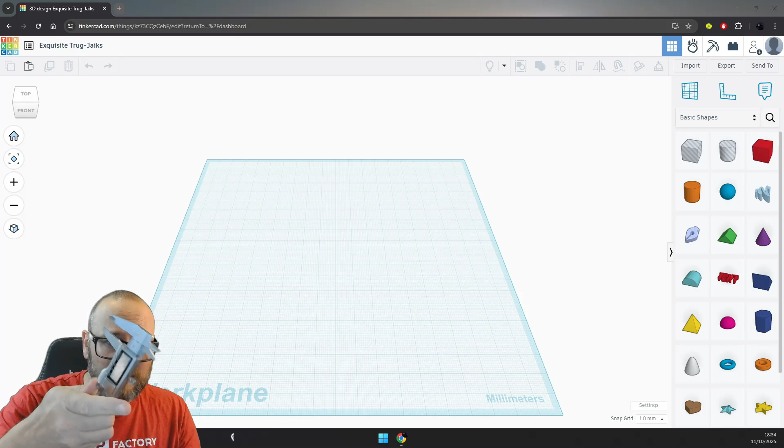So all I'm going to do first off - I've got the design, and the good old measuring calipers that have run out of batteries. So what I need to know straight off is how big this is. It's bigger than my calipers just - it's 130 millimeters long. We're not going to go that big because we don't need all the space inside, we're not pushed, and I want it to 3D print a bit faster. So it's 130 by 75 millimeters.

I'm not telling you what that is in freedom units. If you work in inches, figure it out for yourself. The rest of us work in millimeters because it's an easier, better type of measurement. So get used to it.

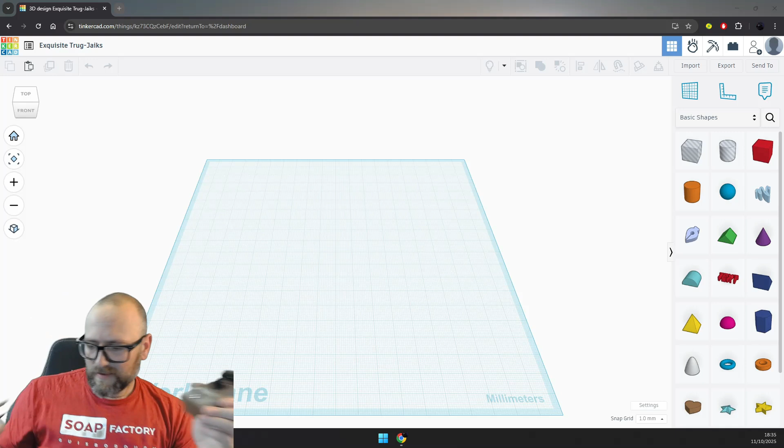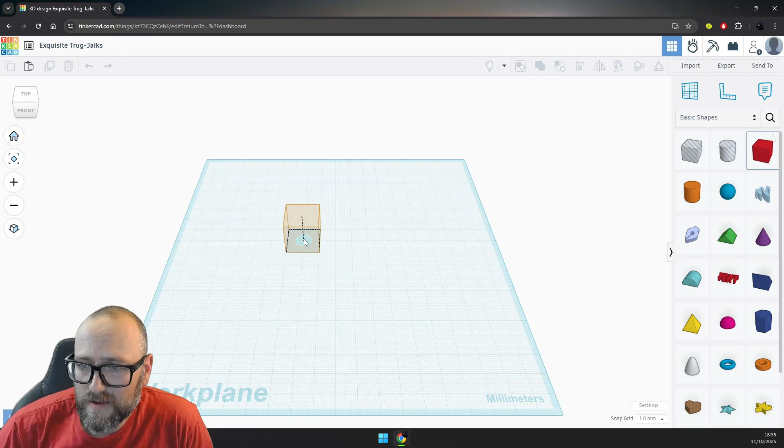And it is 37 millimeters high. Right off in Tinkercad, I'm not going to make it that big - I'm going to make it smaller than that, but not as small as this. But I will do a mini case, I might decide I like them better and go with that. But we'll just take the square for starters. We're going to make it 30 millimeters high, so not 37, it'll be 30. You don't need all the space, it's fine.

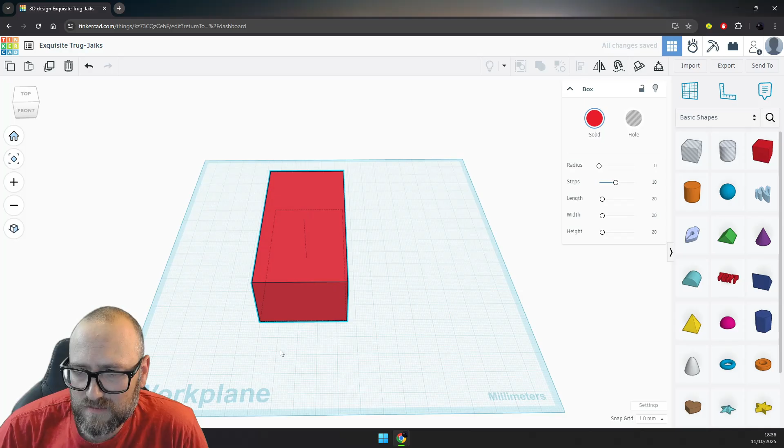45 by 90 - that looks like a reasonable dimension to me.

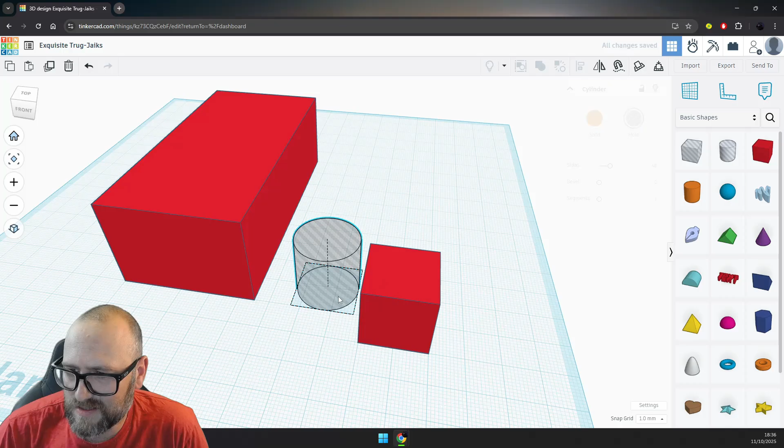And what I like to do is round the corners off - you'll see this in everything I do, where it lies flat on the print bed. I like to round the corners because you get less failed prints, because with square corners it seems to be like a stress point as you print, and a problem area. If you're going to get a problem arise, I personally found it tends to come on square corners, like a stress point in engineering.

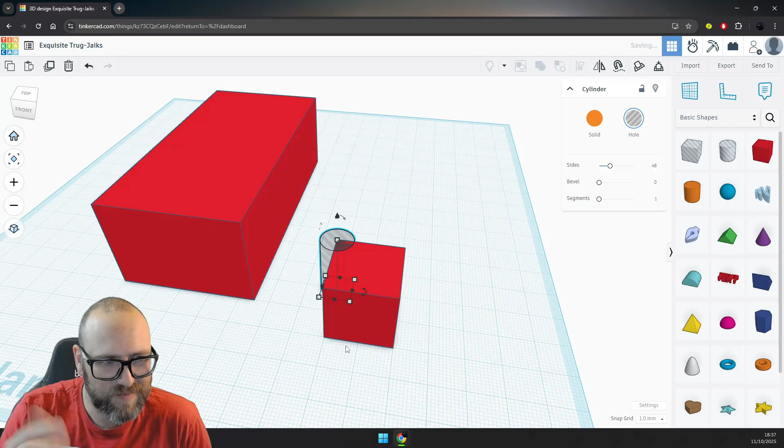I don't know whether that's just in my head, but that's personally what I've found from things. So we'll merge those two together, and we've got the cutout for the corner there. Take that up so it's 30 millimeters high, and we make a hole out of it.

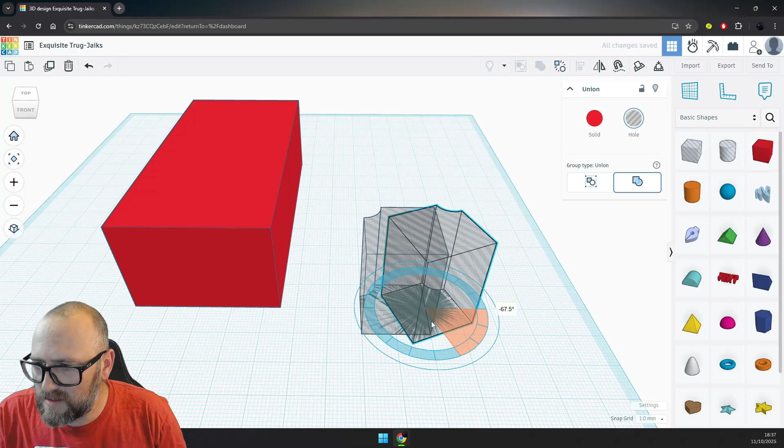We're going to copy and paste, so we've got two of them, and we'll turn that one around to meet that. Oh, I've double clicked on it - my mouse is breaking a bit, and this is why. Oh no, we're fine there. Oh, it's done it again. Like I say, there are better tools out there, but this one's free, and I get away with it, and it does what I need.

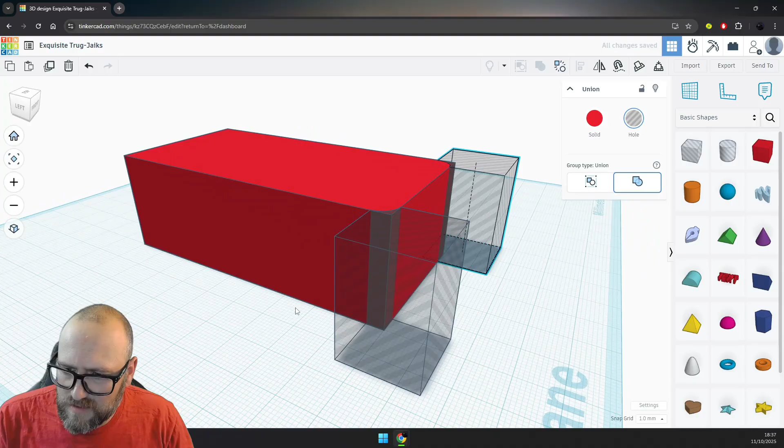So we'll copy that there, move that there, and they are both lined up where we need them. So we're going to copy them, paste them, and turn them around that way. And we'll move them up here. There we go. That is all four corners aligned.

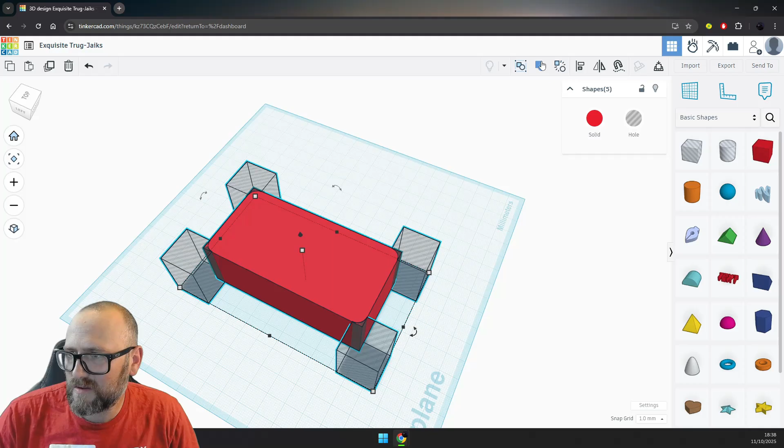So we'll Control and A to select all. It's the usual shortcut keys, and we'll hit merge. And there we have our case design. You can still change the height of it if you need to, but there it is with the rounded corners. It's 45 millimeters wide, which I'm actually thinking on now, that's a bit of a pain in the ass for finding the center line of it, but I'm sure we'll cope fine.

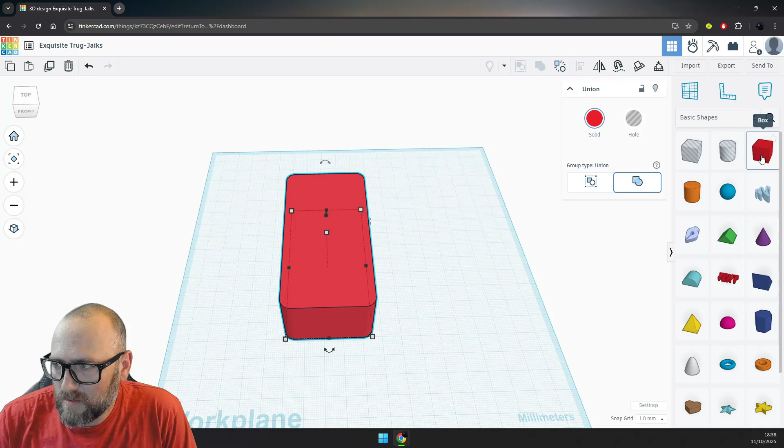So yeah, let's crack on. The first thing I kind of want to do, obviously it needs to be hollow. So the best way to do that, I want the 3 millimeter wall thickness on it, just because I found that works well enough.

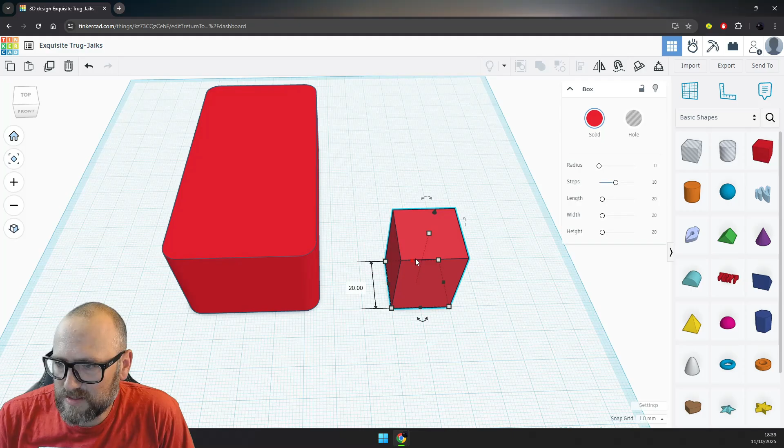So we want 27 millimeters high, and that is 45 by 90. So it's twice as long as it is there. So we take 6 millimeters off both ends of the 90, and that gives us 84 millimeters. The width is going to have to be 45 minus 6, that's 39. 39? Yeah, 39 millimeters. What I should have done with that, in fact, I can do it with this - I can ungroup that.

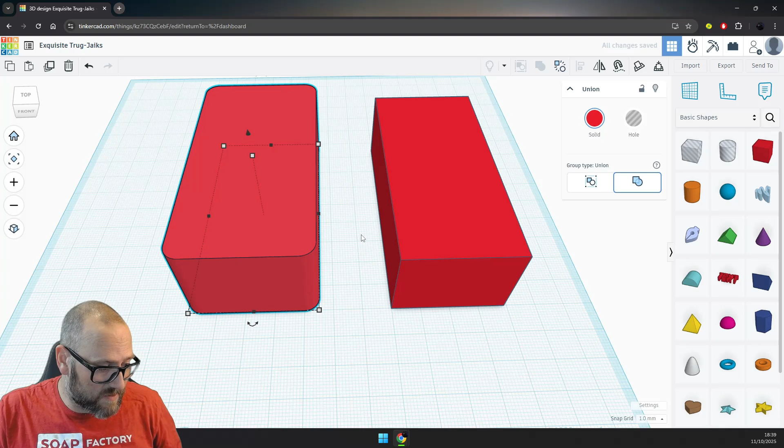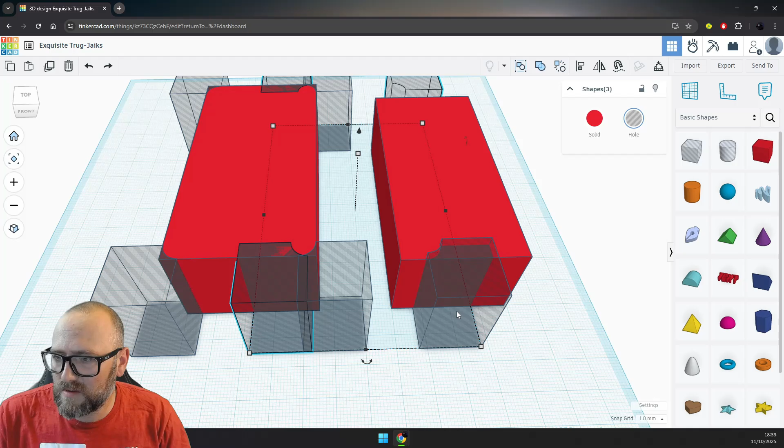There we go. We'll select the four corners, copy them, paste them. Doing it again. So that one, that one, that one, that one. So, what is it doing to me today? It'll be because my mouse button, for some reason, is playing up. Maybe I need a new mouse.

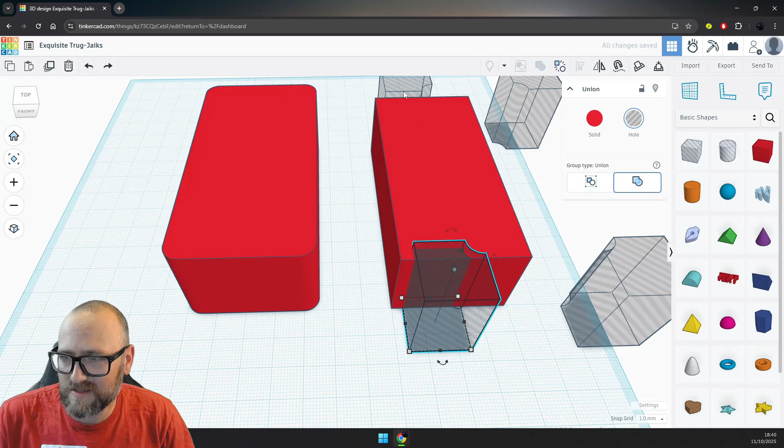So we'll click and drag them over there - worry about them later. And we're going to just select all these, actually, merge them back together. We'll select these four. This mouse button is going to give me hell through this video, I can feel it coming. But this is what I do - I don't script stuff, and it's all real and live, and this is as it happens properly.

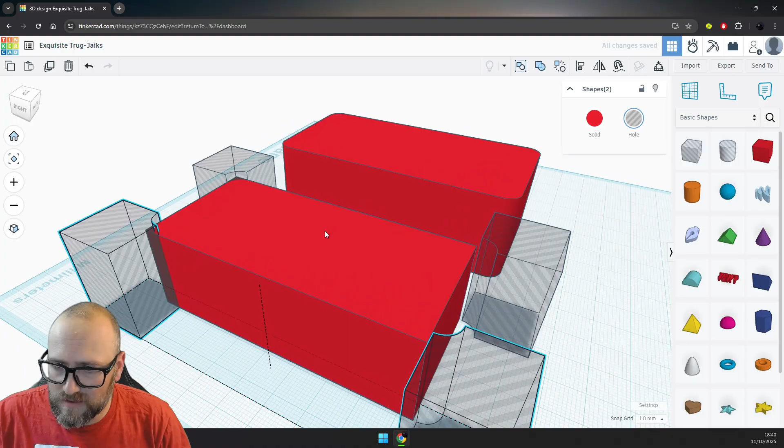So there we go. These two we then need to move to the left a bit. You can use your keys rather than dragging with the mouse, and if your mouse is dodgy like mine, it's probably going to be less hassle for you. That's good. So then we drag these two up there, because we're going to have to trim the corners off this to make it fit inside that.

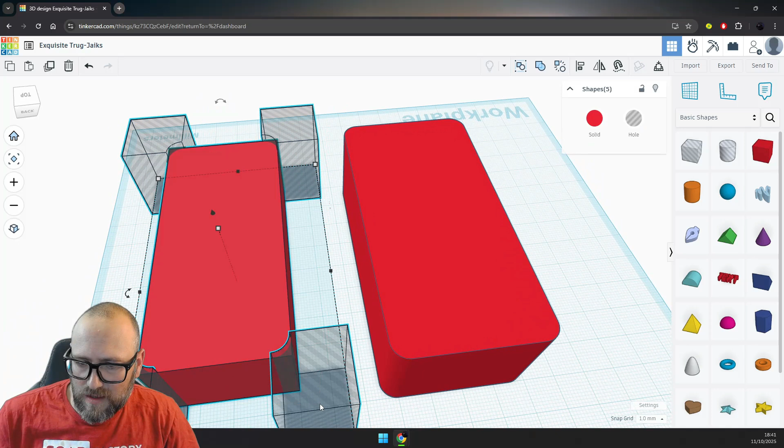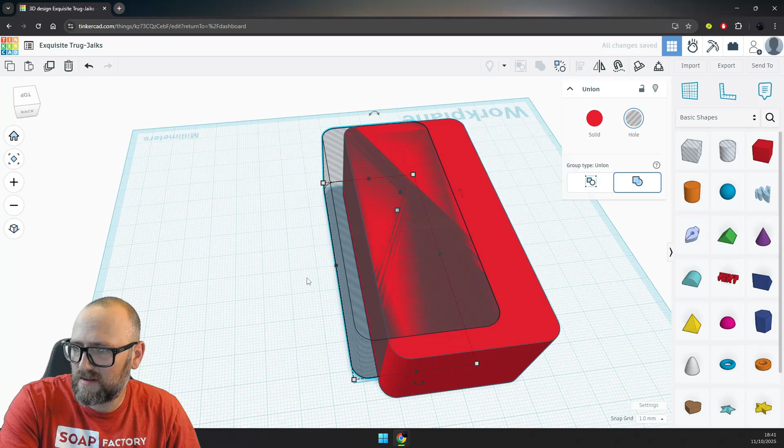So all we're going to do now, take them, and we're going to union group that. We're going to turn it into a hole, lift it up to 3 millimeter thickness, and we now need - what is it doing? There we go. We now need to move this right into the center of this one. So we might need to change the scale on it. Oh, will we? That looks well lined up.

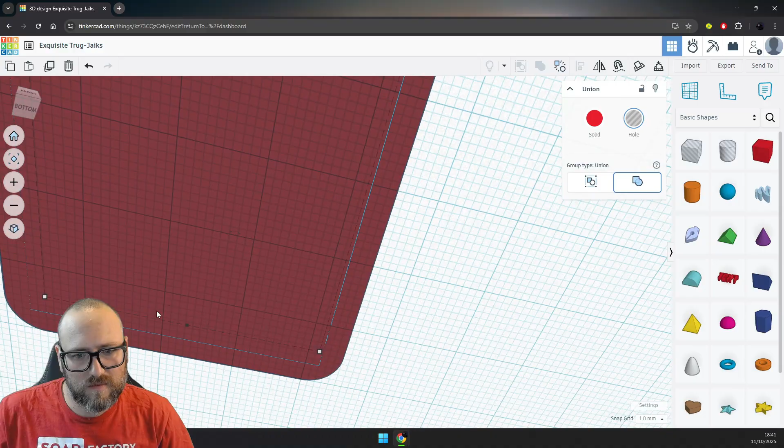And we can check from underneath. You can count the squares there, with 3 off that side, 3 off there. So by association, because it was 6 millimeters all the way, we should be 3 off there and 3 off the bottom as well. Yep, we are. Well done, I can add up.

We're going to select all again and union them, and that should give us the hollowed out box, the enclosure. Maybe at some point we'll do a back for this. I will.

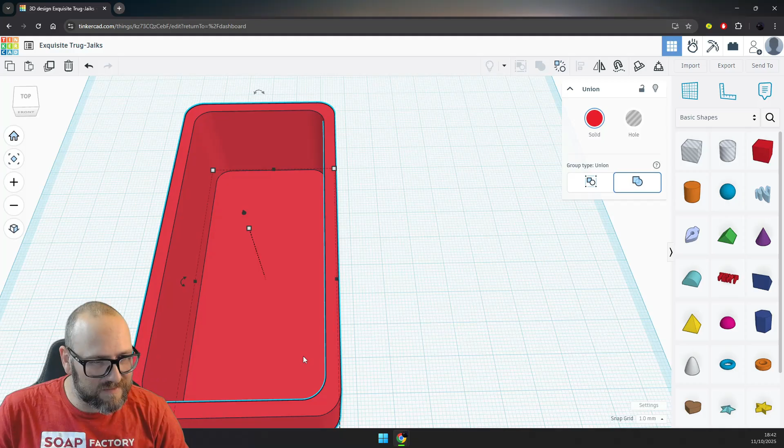I'll do one later. But sometimes it's nice to leave the back off so you can get in and mess around.

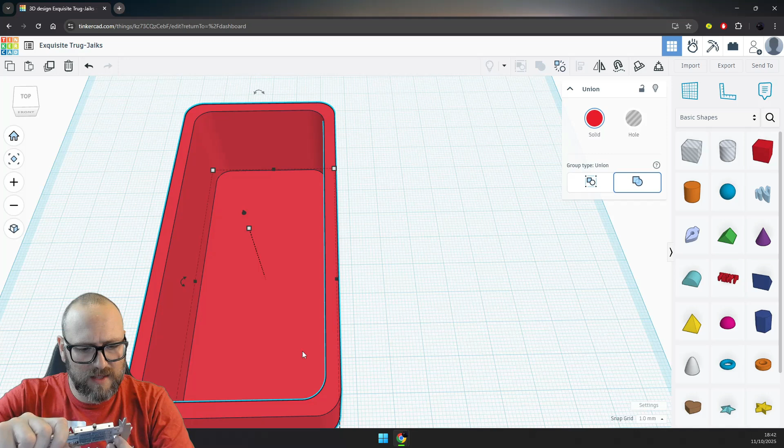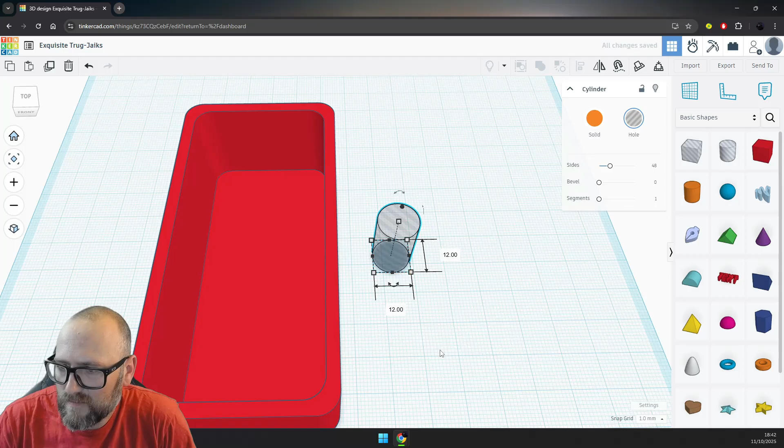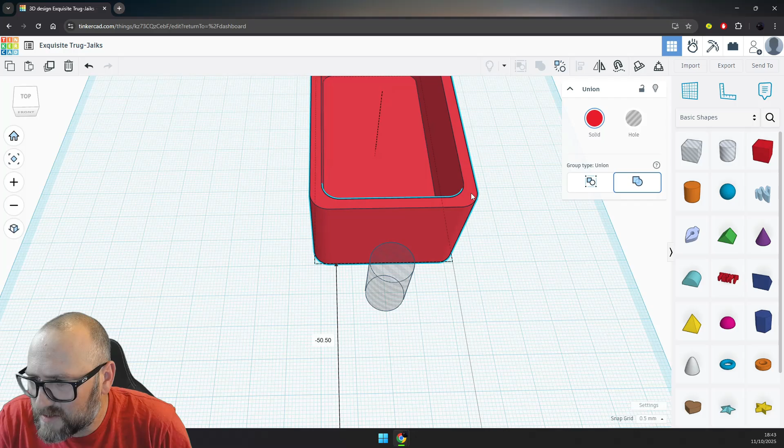But now we need the halfway point of 45, which I know is 22.5, but we're going to set our grid to 0.5 millimeter steps, and we're going to place that so we're 2.5 millimeters in on that line there. So either side will be 2.5. That's our center line.

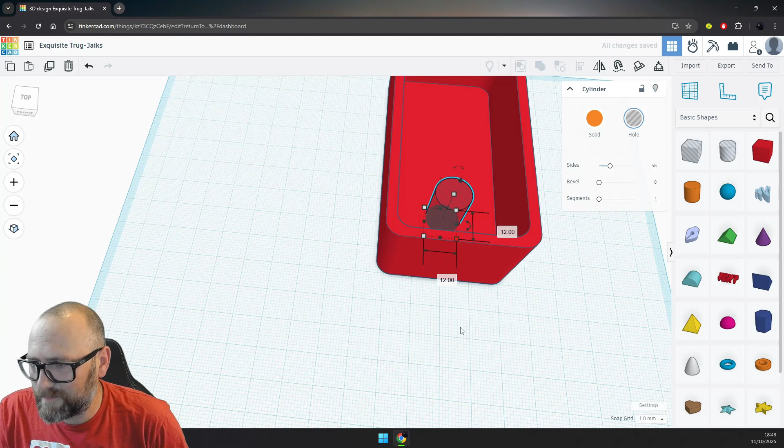And we can go back to a 1 millimeter snap to grid now. And what we want to do is just place that kind of evenly in the bottom. So maybe we should have done it the other way, but I did it that way. So we'll move that back up, with 13 millimeters off the bottom, and that should be 16.5 off the sides. That gives us plenty of room and space for everything.

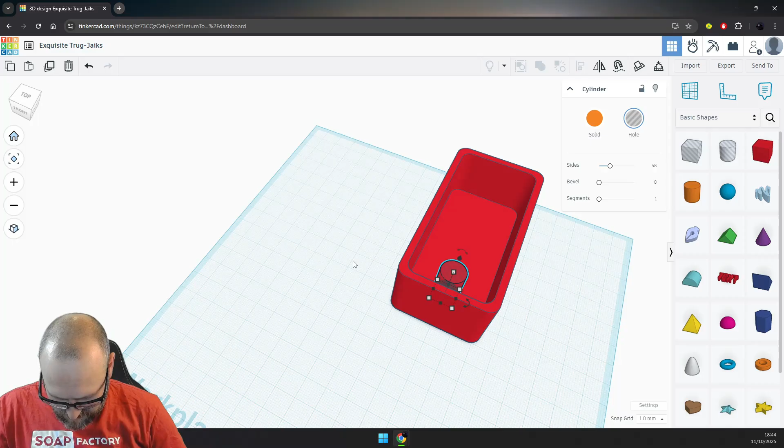And we'll get that threaded part of the insert through. We've got more than 3 millimeters to play with, so we don't need to thin any parts of the case out. So there's our switch in. That's one part done.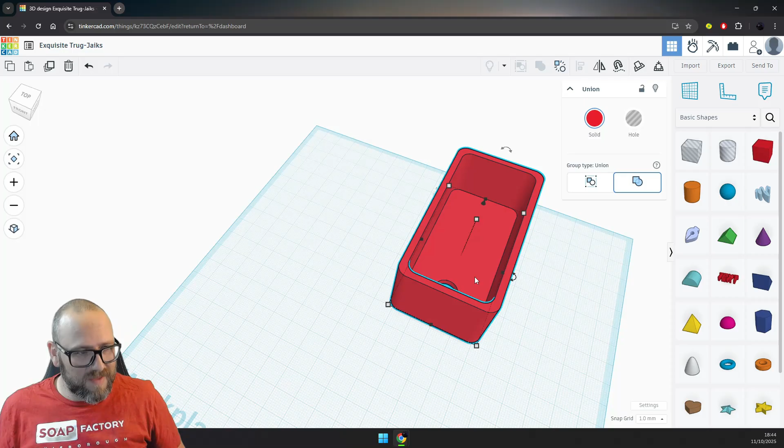I have, as well, as I forgot to mention in the bill of materials video, because this is completely unplanned - if you're me, these aren't all the ones, but these are the ones considered to be used for this. I've got a small black with silver, a medium large gold, and a large black one.

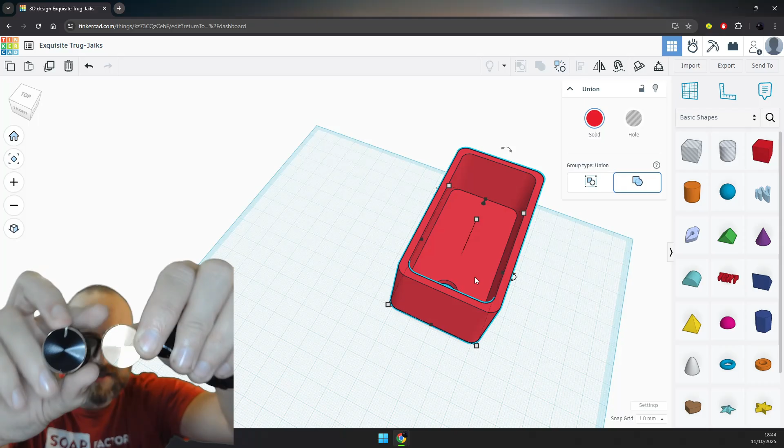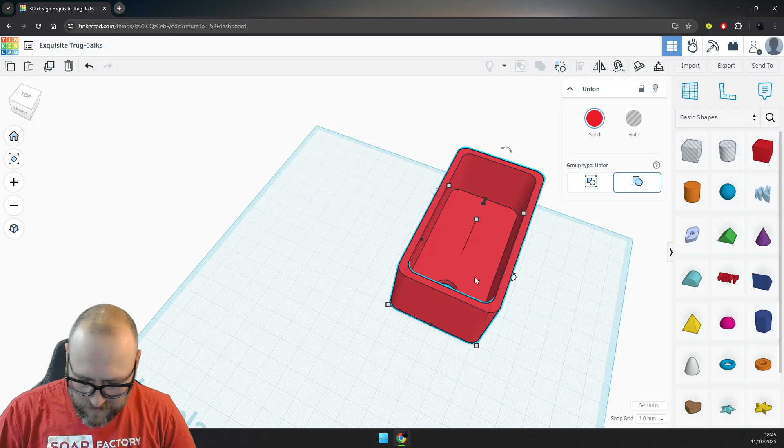So I don't know which one I'm going to select. I'm leaning towards these two because this one's a bit little, and when we've got one pot on it with one knob, it's nice to just have one larger one to make it cool. So I'm going to go with them, and I might center it, I might not. Let's find out when we come to draw that on now.

And we've got the volume pot here, so we need to take a measurement, and it's got that little tab on the side, so I will hollow out for that in a bit, but I'm not going to do it on this video. It's fart arsing about, and you can figure that out for yourself if you want to do these, but I will release the STL anyway, so you can do it yourself.

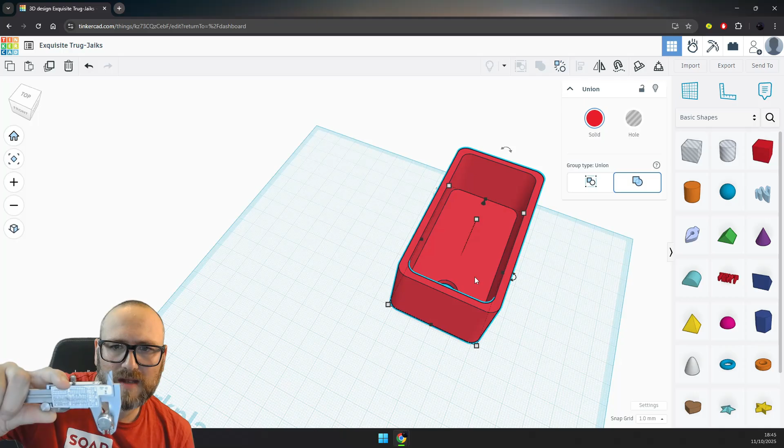So measure that, and these are only about 6 mil, so I'm going to do 7. We'll call it 7 on the measurement. So how do we want it to look?

I kind of think we'll bang it right in the middle there at that point. So we need 7. Yep, it's a bit awkward working from this angle. I'm sure I'll figure it out. 6, 7, and we'll knock that down to 7 in both directions.

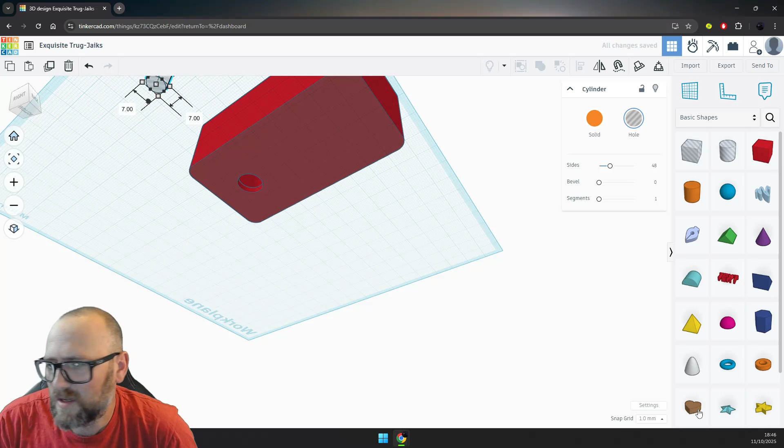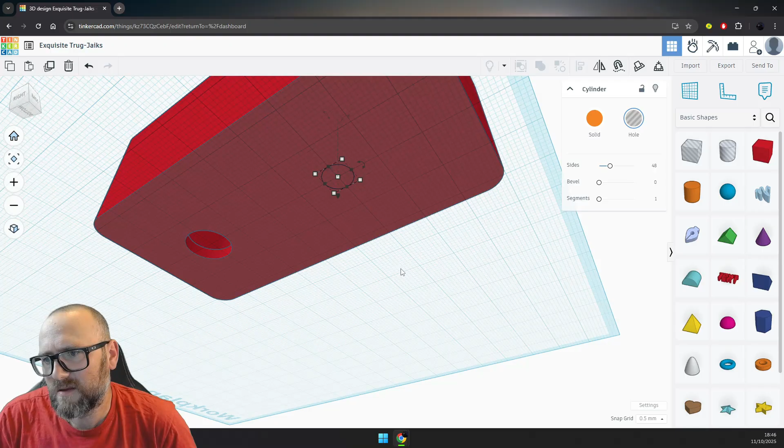So we then want to put the grid back to 0.5 millimeter to line that up with our selected cross in the middle there. And you can see the center line, it's quite handy, just pop in there. So we're that much down and centered. Yeah, we'll do that, I think that's going to look all right. Select all, merge them. And that's our 2 holes drilled in that format of case. And it looks kind of cool.

I want the jack inputs through the top there. So let's go back to the... I probably shouldn't have done that before I measured them. We might find out they're an awkward size.

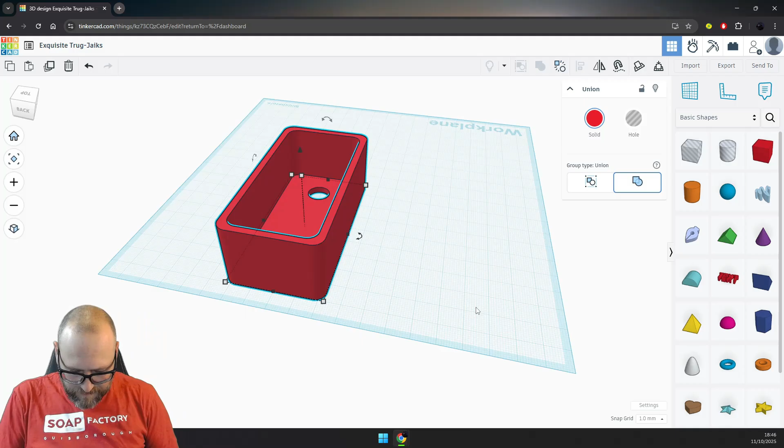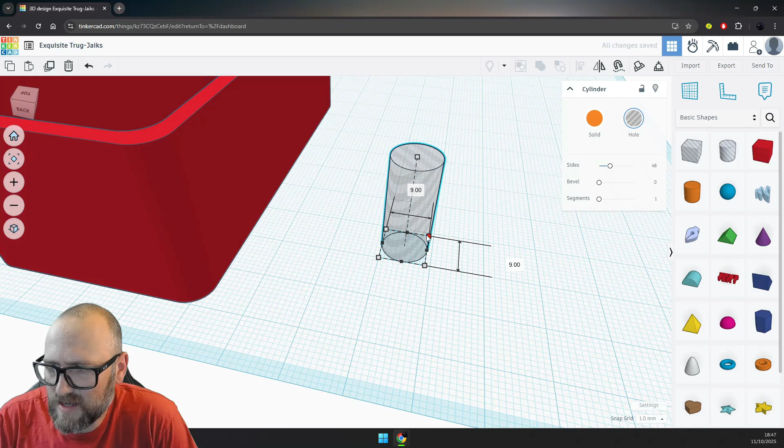And again, we just measure that, and about just over 8mm. So we're going to call it 9, because the last thing you want to do when you're doing this—I know it's nice to have tight tolerances and get everything perfect, but the last thing you want is to print it out and find parts interfere, or they don't quite fit in the holes, and it wouldn't be the first time I've done that.

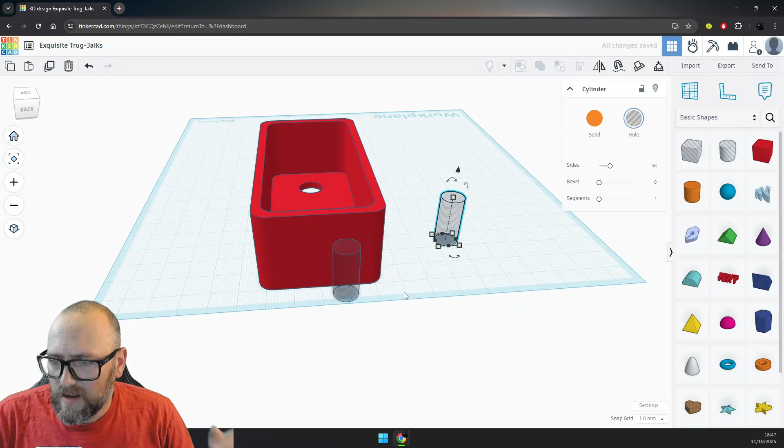So we leave plenty of space between these. That looks good, actually. I'm happy with that spacing.

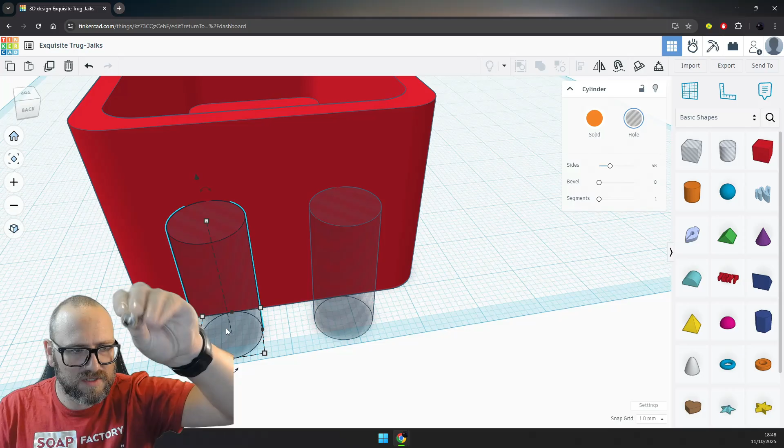So that's not evenly spaced, is it? What have I done? I've gone 3mm over there, 3 over there, and that's 8 in the middle. 8 in the middle of these should be plenty, because you can twist them around as you put them in to line the tabs and the pins up on the back. But we'll just double check.

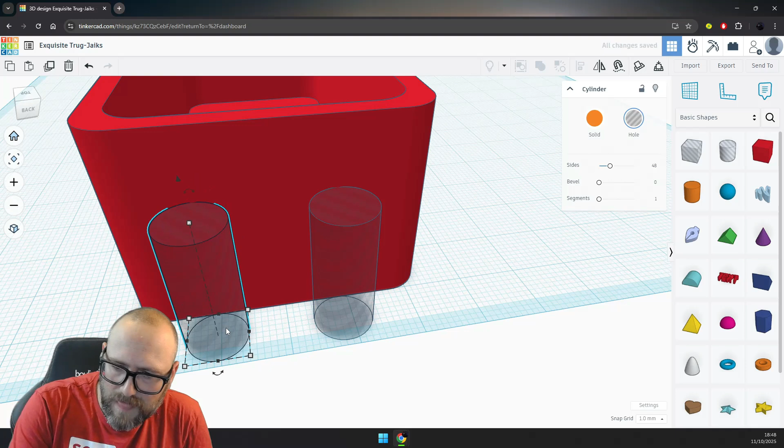That is about 5mm on the sides. So maybe with the 8, we would get a little bit of interference, and that's why it's always worth checking. I'm going to space them a little bit further. Where's that coming down? That is half—oh, the center will be half. That should do it, because we've got 6mm, so we should have a 2mm gap in the middle. No problem.

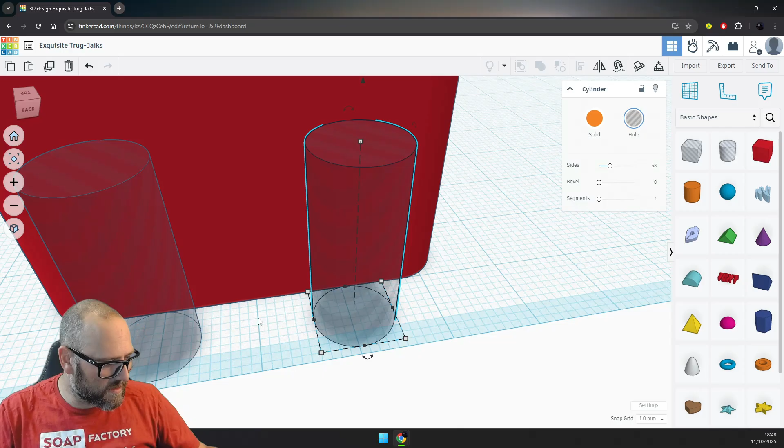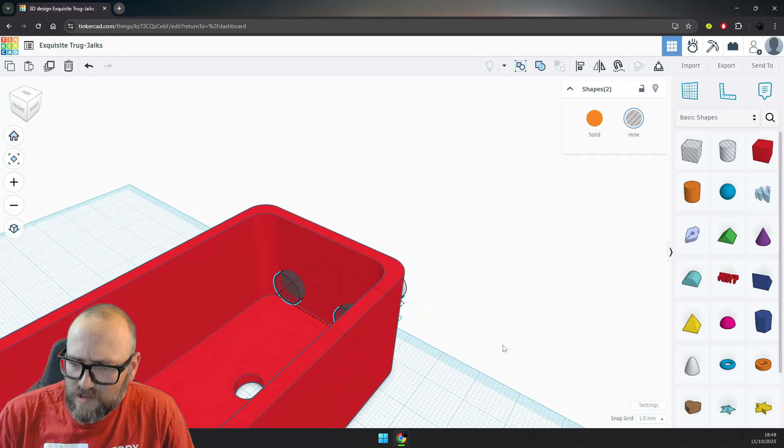Where was my height again? That was a slightly odd value as well, wasn't it? We've got them, they're going all the way through. Will that go in there? They're a bit close to the edge, actually, aren't they? Right, well, we'll get them—no, you know what I'm going to do, actually, just to make sure they're spaced in a little bit from the sides.

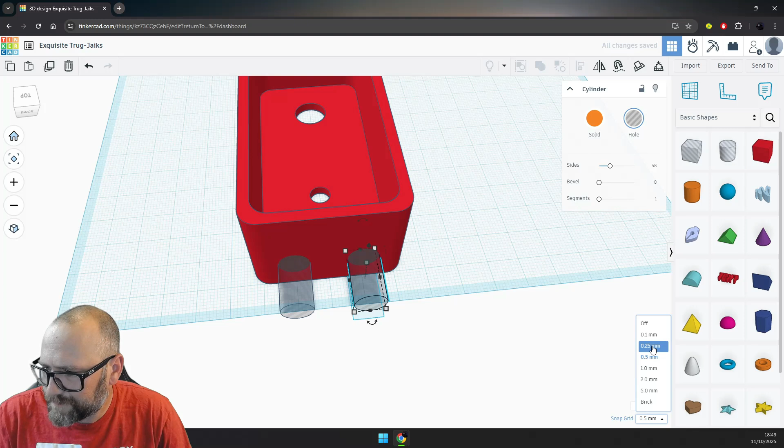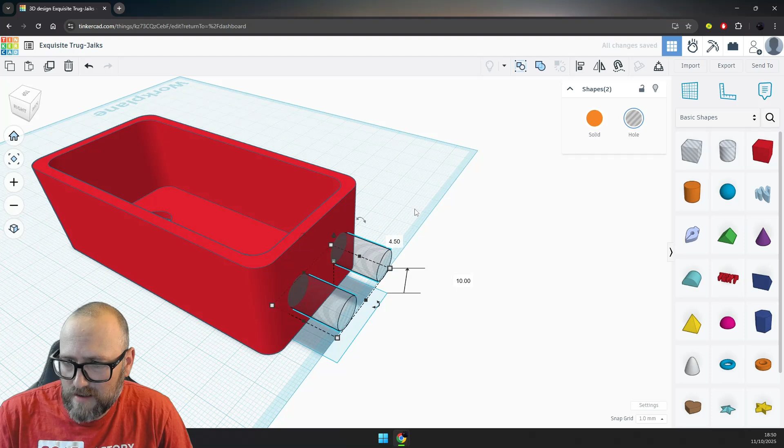We're going to put them on that 0.5mm setting. We know they're the right—I'm going to find out now that I should have left it that. So how high are they? 9mm, and that's 30mm high. So knowing that the case is 3mm and we want at least a 5mm gap, they need to be at least 8mm high. Let's put them at 10. Yeah, so they're not quite up to the edge.

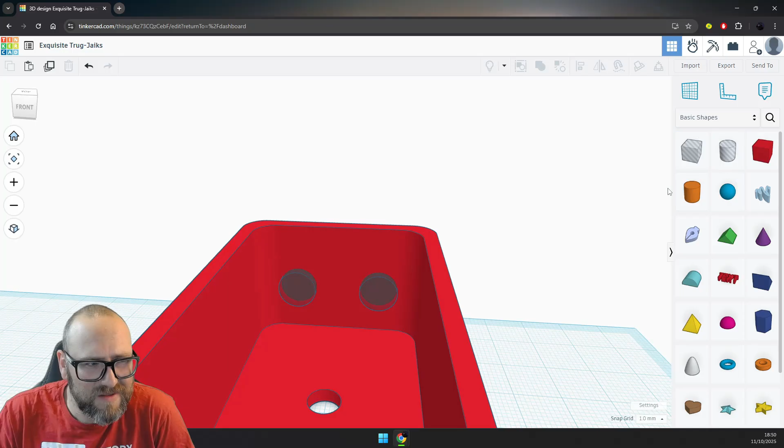We might put a lip in there to close the case, which gives us a bit more room where we need it, but there's plenty of clearance around the top. We might have a problem on the inside, however. I think I'm going to live dangerously—I'll 3D print one of these and fit the parts before. So you'll get the nice polished revised version after I've spent 12 hours watching this print and realize I've done something wrong. Yeah, I think that's all right for the case.

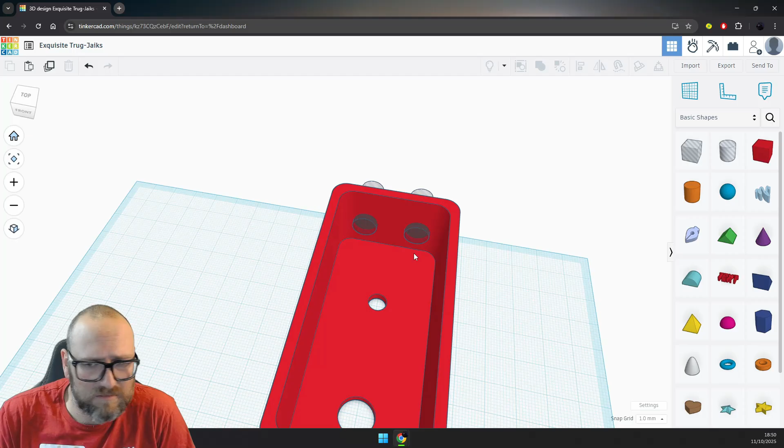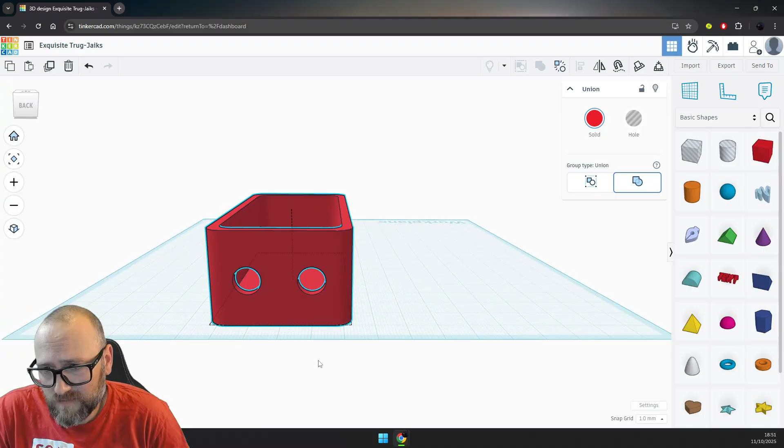We'll select all, merge that, and just do a quick view from underneath. That's all we need for our mix volume pot and our switch going in the bottom. That does look huge, but I guess it is compared to the other holes—nice big hole on the end. That'll print that way up fine, and we'll just put a bit of support in there to keep everything up where it should be.

Yeah, that is our 3D printable electronics case. Download it now—I'll get on with printing.